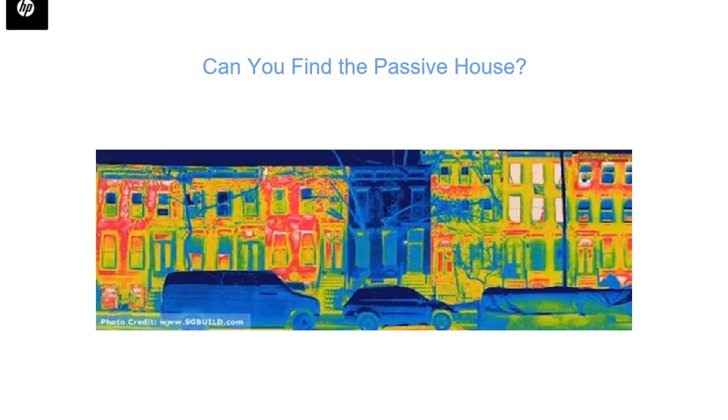So this is the principles of passive house. This is why it works. So the first thing that we do is we take advantage of solar gain. Now I just want to point out, this is different than if you all grew up in the 70s and 80s like I did. Remember there were solar homes? Well, passive house is not that. Solar homes are totally different things. Passive house does take advantage of solar gains, but you don't have to have a particular building orientation or huge windows, that kind of thing. I just want to point that out. You can make it normal looking and you can site it anywhere.

Passive houses are built in all climates, whether there's sun or not, but we do take advantage of solar gain when it's available. The second is the envelope itself. So specifically, it doesn't necessarily mean super insulation. It's more insulation than code, that's for sure.

But it generally means continuous insulation, addressing thermal bridges, which is like metal and things that can bring heat in from the outside to the inside in the summer and vice versa in the winter. But also addressing infiltration, which is number 4. And as part of the envelope too, of course, it means quality windows. And then finally, energy recovery.

People are always surprised to learn that passive house projects have more outside air in them than code buildings. So they're more ventilated because they have active energy recovery systems. Code buildings do not necessarily have that. And then increasingly, people are seeing the benefits of external shading, especially in a setting like a commercial building or an office passive house. So those are the 6 principles.

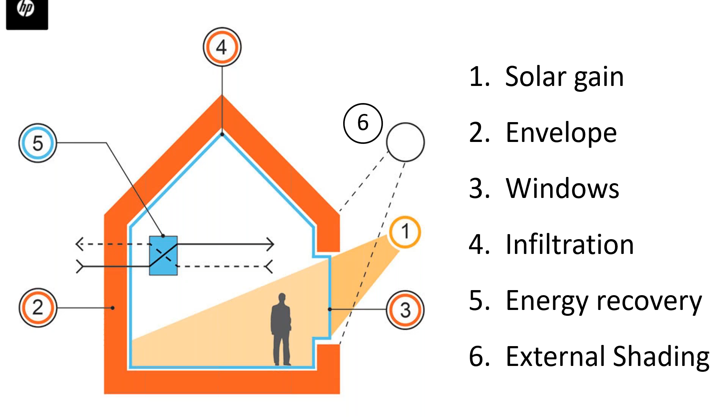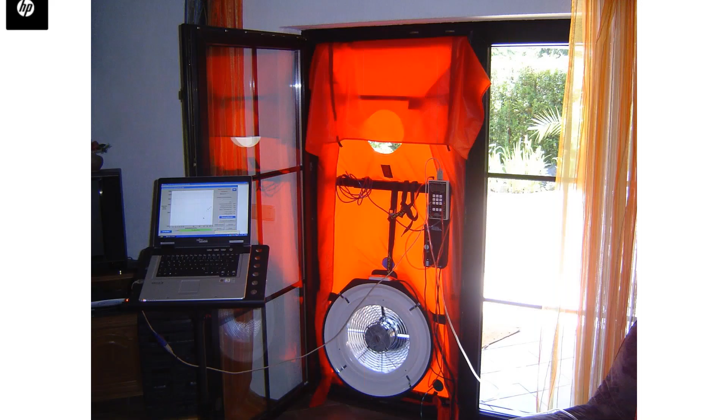All passive houses are tested for infiltration limits, that they have to be below a certain limit. And it doesn't matter if you're a single family home or a 30-story, 1 Winthrop Square office tower. Every last square foot of passive house certified buildings are air infiltration tested. So you do a blower door test on buildings of all sizes. And so they do have massive commercial versions of this for big commercial projects.

The air infiltration in passive house is like 10 times smaller than a code house. So it's way, way down there. Why don't you go to the next slide? Just another quick cross section showing kind of the key features again. That kind of light blue strip that's just to the inboard of the cladding, that is the continuous insulation. That's the key piece of the insulation that makes passive house work. Next slide.

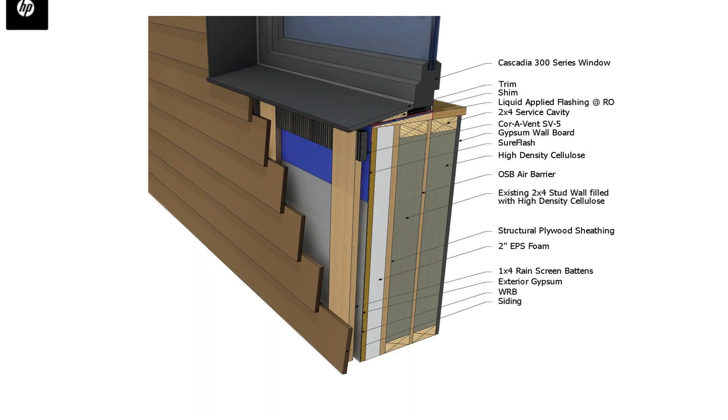The windows themselves are a big part of passive house performance. So the windows have to be thermally broken. And what that means is that on the inside of the wood or metal frames, you have a piece of rubber or gasket that disconnects the metal or wood on the outboard side of the window and the inboard side of the window. In this case, you can see the orthogonal view here, the green. That's what that green is. So at no point in these windows is there a piece of metal that extends from inside to outside.

Now, if you get a non-thermally broken window, just go down to Lowe's and get a window, they have nothing but metal and wood that goes from inside to outside. They're thermal bridges galore. So passive house windows are different than that. They have this thermally broken element, and that's what makes them perform well. And they're not necessarily triple paned. Again, passive houses aren't necessarily super insulated. What they are is continuously insulated, and they address thermal bridging. So I just want to point that out. I want to go to the next slide.

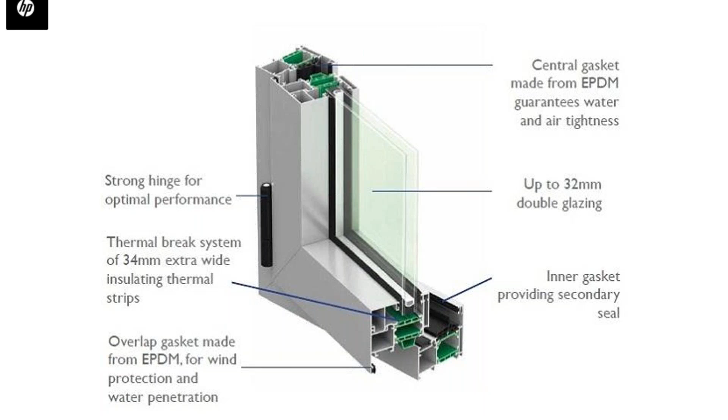So once we have a quality envelope, something magical happens, and that is that the HVAC systems can be radically simplified. So if you look back at the progress we made in the 20th century with the way we do buildings, it's all about condensing boilers and efficiencies of equipment and more and more equipment to try to extract and best use BTUs.

But passive house actually takes it in a different direction. What it does is it addresses the envelope first and makes sure that we don't lose any heat or cool, if you will, from our envelope. And then once we do that, we find that we actually don't need that much HVAC system. We can simplify it significantly. Would you go to the next slide?

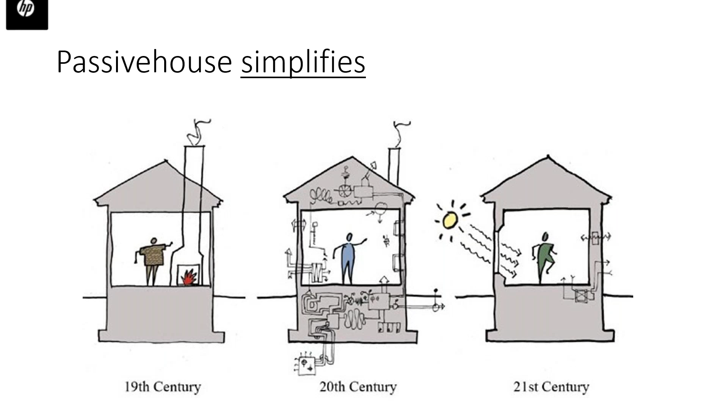So just linking back to why passive house is important to Massachusetts. Massachusetts, as you're probably aware, needs to meet certain emissions reductions on a statewide level to achieve Global Warming Solutions Act objectives. So that's a number of buckets, right? So starting from left: passive house uses way less energy. That's kind of obvious.

That's the first one. But the other thing that passive house does is that the peak loads of the buildings are way smaller. In fact, you can make the peak load zero on a passive house because you can turn off the heating and cooling systems during peak times, because the building can easily ride through any peaks. And so when we look at global warming solutions, we have to address peaks. Passive house addresses that.

The middle one is hugely important. Passive house makes it very easy to electrify space heating. One of the challenges with heat pumps and VRF is that it can get a little complicated. It can be a little expensive, but that's when you're doing a code building, because you have to distribute it everywhere. But in a passive house, I'll show you some photos of this, they don't have to do that. It makes electrification simple.

Resilience, something you might be interested in. Imagine you have a school, police station, fire station, any sort of public gathering place, nursing home, elderly housing, any apartment building. If these buildings lose heat or cooling or power, they stay warm or cool. They stay fine on the inside. Way more resilient than anything else you can get out there.

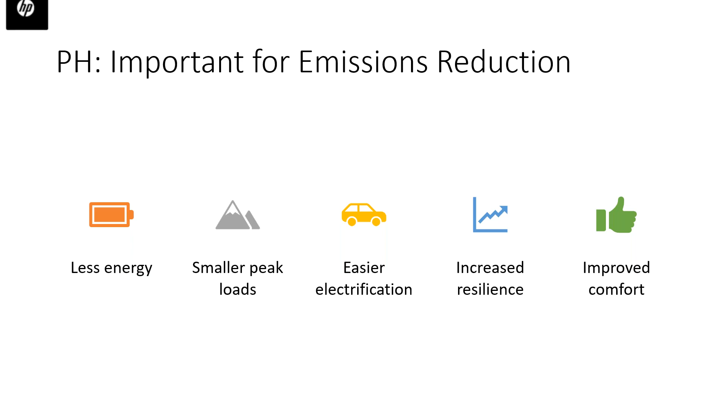And finally, it's just a way better experience. You can sit next to a window in a passive house office building or whatever. It's totally comfortable. Let's go to the next slide.

It's an unfortunate thing that the word house is in the word passive house, and it's kind of just a vestige of its evolution. But passive house can be done with any building of any size, and as a retrofit. So just want to make that clear. There are some places on Earth now that are making passive house code. So for example, Brussels, Belgium: all buildings are passive house, period.

I find this an interesting thing for me because my grandparents came from Brussels. So maybe this is like a weird fate on my part to be involved in this now. So I thought that was cool. Why don't you go to the next slide?

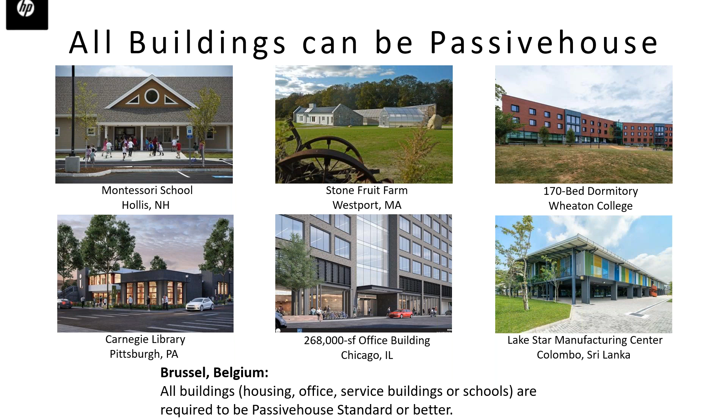So here's the energy performance of a passive house. This is a multifamily. A code multifamily would have an energy use intensity, in kBTUs per square foot per year, of about 40. That would actually be a really well constructed code building. It's not uncommon to see things much worse than that even still. But even if you built a decent building to code, it would be about 40. And you can see that top orange part, that's the portion of the energy use that's for space heating.

The passive house does two things. It makes the whole energy go down. So the cooling goes down, the fan use, all that stuff goes way down. So we can easily get to EUIs of 20. So that's thing one. Thing two is that it crushes the heating use. You can see it goes from about 15, which is the size of the orange part on the left, to something less than 2 or 3. And that has huge implications for the Global Warming Solutions Act, because again, it means that we can easily electrify space heating, which is a really big challenge right now. Let's go to the next slide.

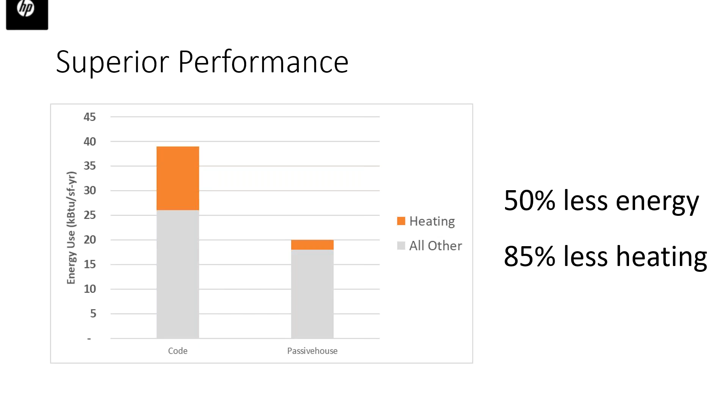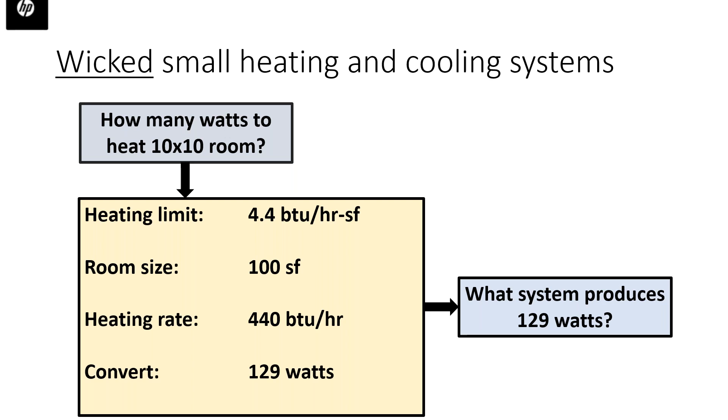So I just want to put into perspective how much we crush space heating. And the same goes for space cooling, it's the same parallel. But just to put some nerdy numbers to this, if you had a 10 by 10 room, the heating limit in passive house is 4.4 BTUs per hour per square foot. So in a room that's 100 square feet, that would be about 129 watts. So let's get some perspective on things that make 129 watts. Let's go to the next slide.

So the furnace or boiler in a typical single family house, which might look like what you have in your basement, is 20,000 watts. That's how much that produces. So your typical furnace or boiler is literally 200 times bigger than necessary for our 10 by 10 room. It's literally orders of magnitude too large. Next slide.

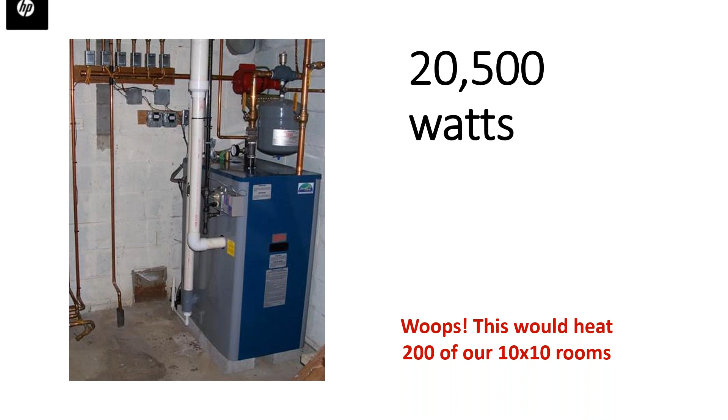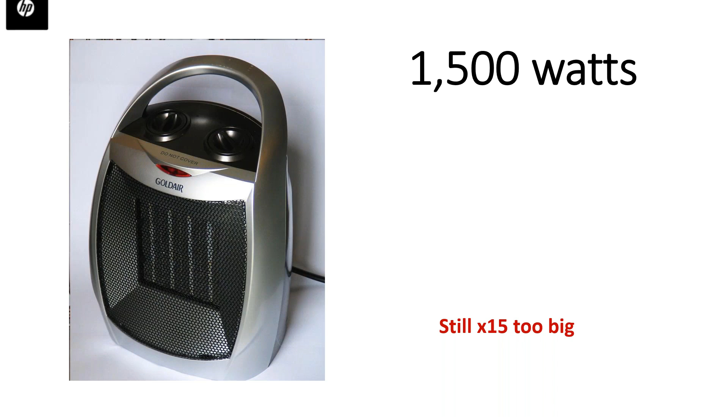So even a space heater is 15 times more heating than we need if we had our 100 square foot room built to passive house standards. Go to the next slide. Even a toaster is 10 times too much heating. So if we had our 10 by 10 room built to passive house and we ran a toaster in it, it would get too hot. So go to the next slide.

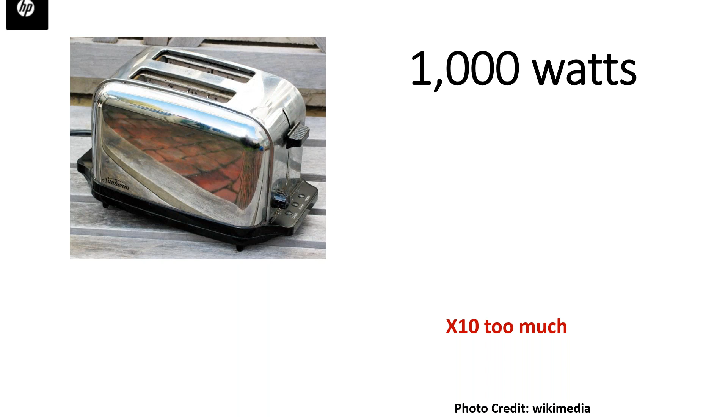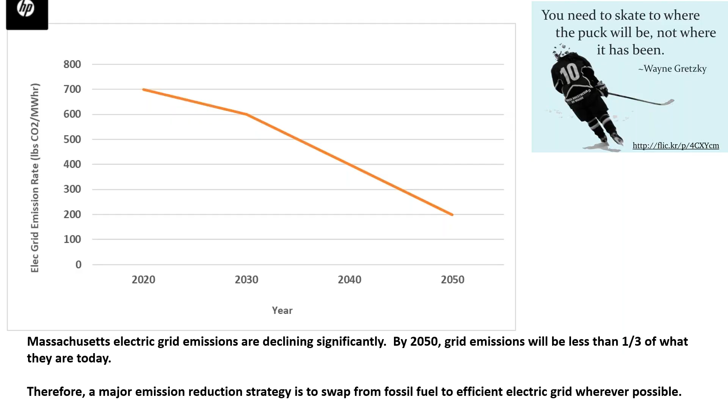This is what I call the Wayne Gretzky method. We don't want to be looking backwards. We want to look forwards and ask ourselves, what emissions will this building that we're building today have in 2050? So we want to look at the emissions of the grid then, right, and not look backwards. Next slide. Just want to put some numbers to this because this always generates questions. So here's a few numbers.

Now, if you double the grid emissions, what that means is that electrification of space heating with heat pumps increases emissions of space heating. Okay, so you can see how they come to the wrong conclusion. So make sure that when people are analyzing this stuff, they're using Massachusetts emissions, because even today we're already getting a benefit, and it's gonna get even better as we go into the future.

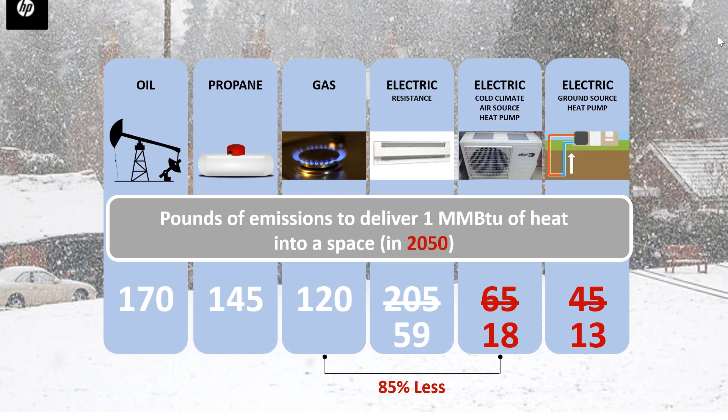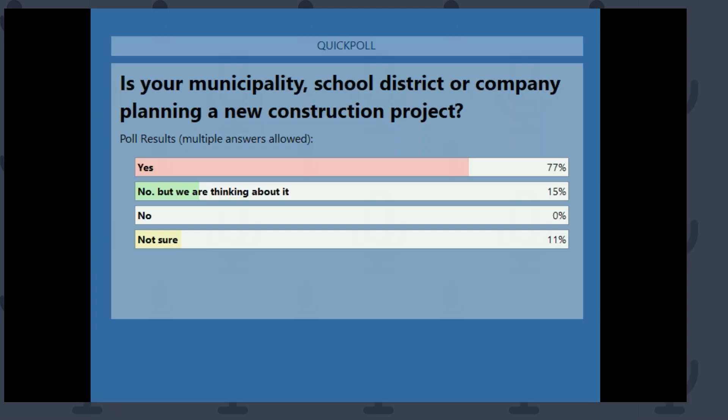Oh, poll question. So let's see, is your municipality, school district, or company planning any new construction projects? Oh my gosh, look at this. Yes, 77%. This is amazing. And add 15 thinking about it. So if you add those two, that's about 90% planning new construction projects. So that's great. So here's a chance to apply Passive House.

All right, let's go to the next slide. Just not seeing that slide. Give me 1 second. Okay, thank you, Karen. Again, thank you to Karen for organizing all this.

While that slide comes up, I just want to reinforce again how much we appreciate green communities participants, to not only influence what they do in their town for their municipal buildings, but also influence projects that come to town, whether they're private projects. We see a lot of that. So that's really important.

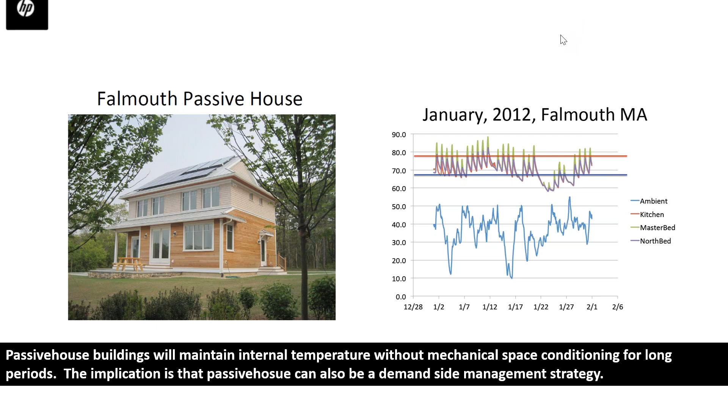All right, everyone wants to know if it costs more. So the answer is not necessarily. So here's the data: we organized a bunch of different projects, looked at as-built construction costs and compared them to similar construction costs, same time, same place, for similar buildings. And we observed a little trend here.

So what we found is that for low and mid-rise passive house, well, let me take one step back. Single family passive house is definitely 10%, it can be significantly more than code single family. So I just want to put that aside. Single family passive house can get very expensive. And that's because single family has a lot of wall and roof compared to the usable inside space.

But everything larger than single family, townhouses, multifamilies, office, commercial, schools, those have very efficient envelope to floor ratios. And they also tend to have big HVAC systems when you build them to code. So this is not single families, I should point that out. This is anything but single families.

When it's low rise or mid rise, what we see is that passive house costs anywhere from $0 to $4 per square foot more. All right. And then when it's high rise, it tends to push up into the 8s and 10s. So that's kind of the pattern we see so far.

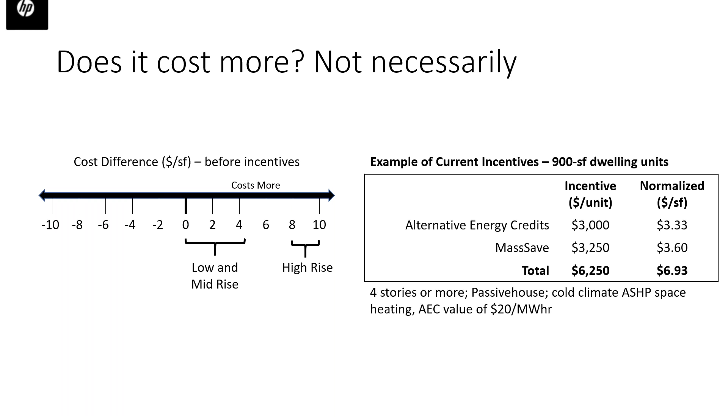So I worked it out on a per square foot basis. So the electrification alternative energy credits, a little over $3 per square foot. The MassSave works out to a little over $3.60 per square foot. And this is the assumptions I'm showing here. These are 900 square foot dwelling units, say, for example. So you can see that the rebates can offset some or all or more than the additional net cost. So it's not necessarily more expensive. To go to the next slide.

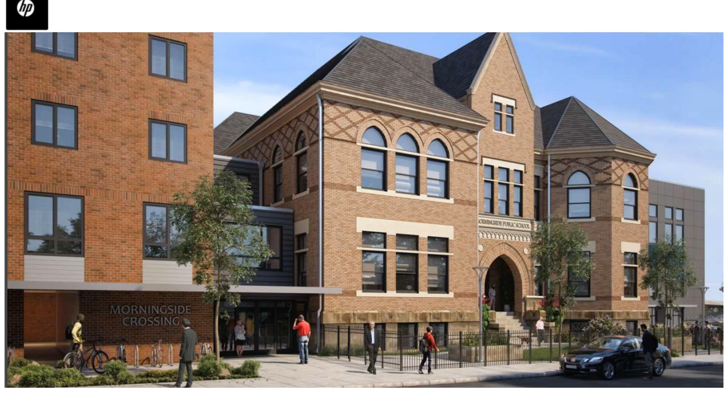How about if you have a historic building like this one? With this one, you don't want to be attaching stuff to the outside of that. You may not even be allowed to do that. It just would kind of stink to wreck all the history. So a lot of you probably have buildings like this in town. This is a real project in Pennsylvania. This was an assisted living facility. And in this case, you can do Passive House from the inside. Why don't you go to the next slide?

So a little hard to see. You get the idea though. On the left picture, this is applying the continuous insulation and air barriers from the inside. It really has to be a gut renovation. So it's just hard to do a historic Passive House retrofit from the inside without really totally altering the inside. When you go in from the outside, you can keep the existing inside very much untouched. But historic renovations kind of require you to go from the inside. So you can see on the left side how that continuous insulation and that air barrier is being applied.

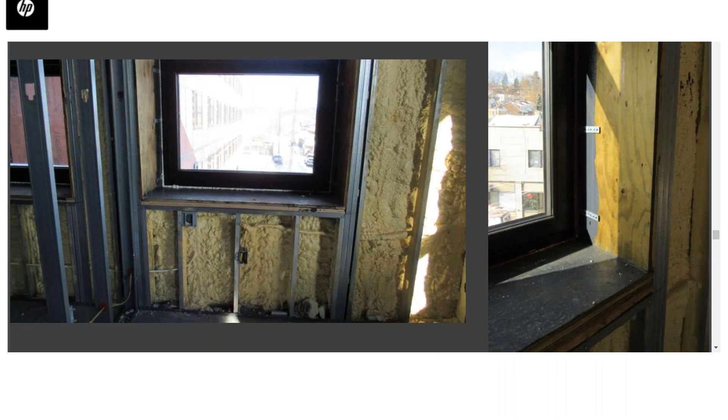The picture on the right shows how much the wall's been built inward. So we kind of lost like 4 or 6 inches of inside space around the perimeters. And that's to accommodate the level of insulation we need and to create the right connections to the new windows. You can see the nice shelf there that's been built. Why don't you go to the next slide? Oh, there is another better picture of the window shelf in that you can see how it's been thickened. So this came out amazing. The results of this project are awesome, and we're able to keep that historic building. Let's go to the next slide.

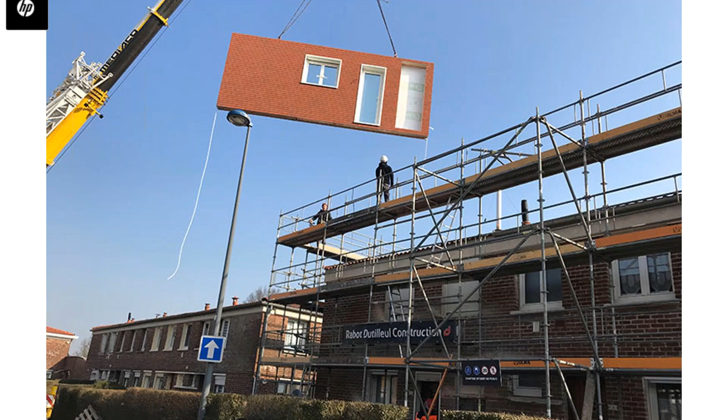So this is another idea that is now popular in the European countries. It's pretty expensive. The numbers I showed you of passive house costs in dollars per square foot in the previous slide, about 3 slides ago, that's for new construction. Retrofits like I'm showing you here are probably more than that, unfortunately.

So in the European countries, they've looked at doing these outside retrofits coming in from the outside, and they realized, like, this is something that's actually modular, right? So what they've done is they've mobilized panel manufacturing companies in the European countries to do these prefab panels that are made in a factory that have the walls, the doors, and the windows already built. And they arrive on site and they're simply installed around the existing building, to surround the existing building. And they do the ceilings too.

And they're making passive house out of all the existing built housing with this. This is called the Energiesprong approach. So there's now something like 26,000 multifamilies in Europe that have done this. And the costs now have gone way down because these factories are able to mass produce these things. So we're just seeing that start in the US. New York has a significant program in Energiesprong for the US, California, and Massachusetts.

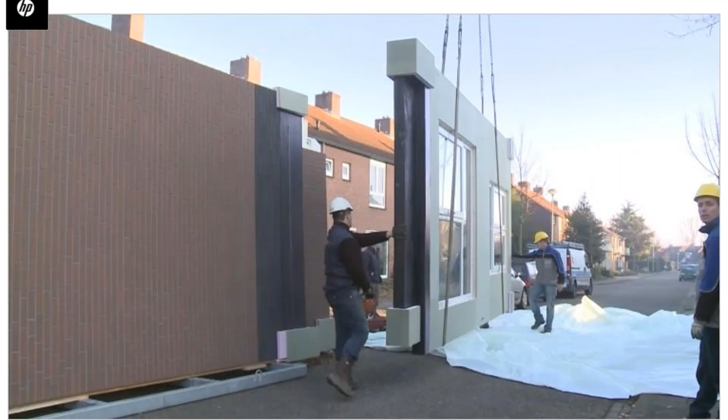We're very happy to host the first 2 projects in the Boston area that will use this approach for some existing housing. Let's go to the next slide. That's just another picture of those panels coming from the factory and being delivered to the project. Next slide.

It maybe seems experimental. Is it new? Is it a research project? The answer is no. There's no research experimental projects going on here. There are 60,000 passive house projects worldwide. So it's been around a long time, mostly in the European countries. It's extremely understood how to do this.

And there are 2 standards for passive house, Passive House Institute and PHIUS, which is the Passive House Institute of the US. Both of them have been in our building code for almost 10 years. So this is something that is accepted and not experimental. Next slide.

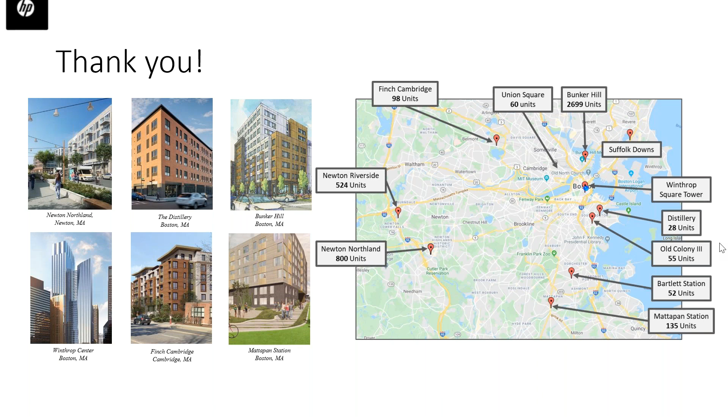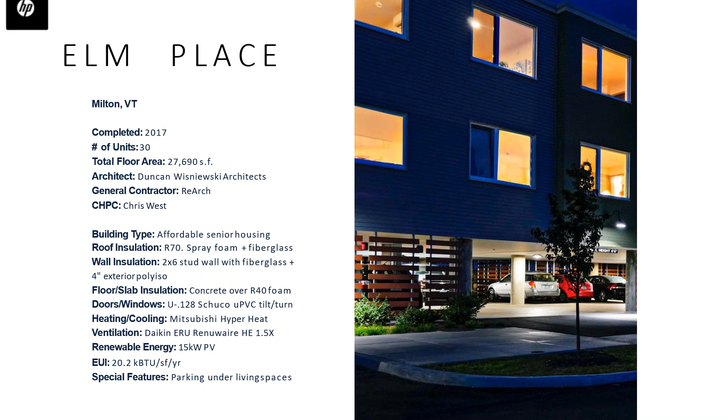If you want to just advance one more slide, in the deck we included about 5 or 6 examples like this. We won't go through them now, but when you get the decks, you can see more detailed information about a bunch of different passive house example projects. So I'll stop there. I don't know if there's any questions that have come in through the chat or whatever format we're using.